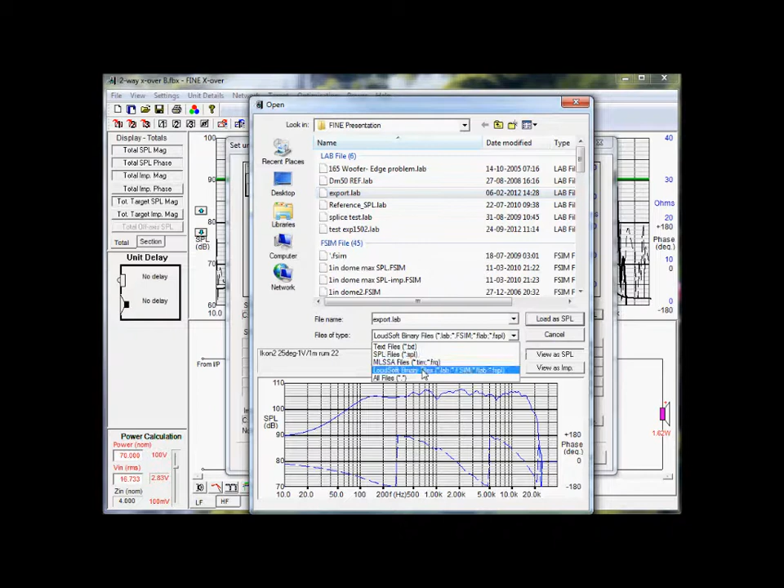So now I will show how to do a two-way crossover design. We import measurements. Here's an example. We can just take any responses we can think of. That includes MLSSA responses, text files from nearly every system. Once we've done that, we need to set the target level and do the same thing for the tweeter, and now we're ready to begin.

Here we have the low pass filter. We can have from first order up to fourth order, and every time you can see that this is actually what's happening. I can move the crossover frequency and the components update at the same time, and you can see that the response is far from the target. So let's see what we can do about this.

Now let's just do a simple second order crossover, and I will take this as Linkwitz-Riley because that works quite well. So now I have chosen a crossover frequency maybe close to 1500, and you can see it's still not very good, so let's do something about that. Now we can optimize these two components, and you can see now we came to a response which is actually quite close to the target.

So let's move on to the tweeter. With the tweeter we can do the same thing. We can change the crossover frequency, so we should try and arrive at the same as before. Let's go for Linkwitz-Riley this time and keep the target as the network.

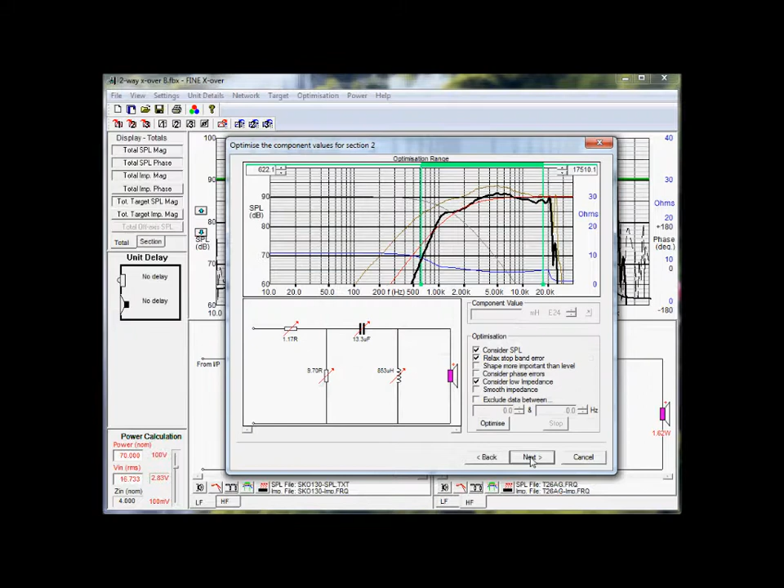This time we also need some attenuation, and I can just put in some attenuation and then let the system optimize. So here we will optimize this circuit now, including the resistors here for the attenuation, like that. And now we have optimized the two sections, and we are ready to move on to the final design.

Here we can see the resulting response, which is not that good. It did not add up really well. So we need to optimize this again, and let's just do that. And now I can see that this parallel resistor, maybe I don't really need it, but the system actually tells me, because it has optimized it nicely, and it says this is 1 megaohm. In other words, we can just leave it out, and then we have simplified it and we have a nice response.

Now let's move on to a more advanced three-way design. In this example I have already optimized the sections, and all we need is to optimize the final response, and we do it the same way as before. We simply set it to optimize, and we can see that it does it really well this time also. So let's move on and see how we actually made these sections.

So here is the woofer section, and we want a crossover frequency of 500 Hertz, and we can see the response of the woofer is actually this pink curve here, which has a very high peak here at 4K. So we really want to attenuate that. So we have chosen a third order crossover this time, and let's try and see if we can optimize this a little better.

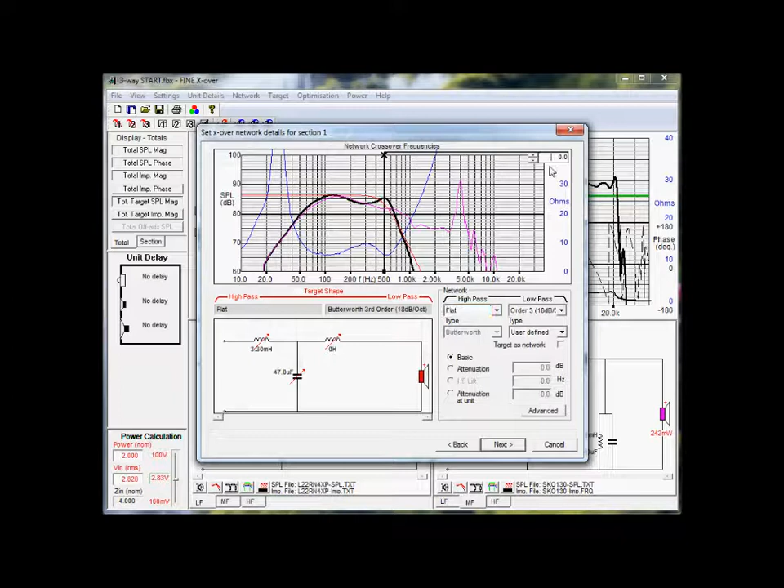Yes, but it's not really flat here, so we want to do that a little better if we can. So let's see if we can try and find a way to overcome this problem. And the problem comes from the rising impedance. It has a very long voice coil, and therefore the impedance is very high. We can do something about that.

We can insert a compensation circuit like this capacitor and resistor. So at high frequencies the capacitor will have a low impedance, so that the impedance here is very low, and therefore shorting the rising impedance. Okay, we will choose this, and this time we will try and optimize again. Aha, this way it worked a lot better.

We can see there's actually one component which is 0. We will leave it there because we may need it later, but it's interesting that it actually found a good curve without using the third order crossover.

Okay, let's move on and look at the mid-range. The mid-range should be ideally a band pass response, and you can see the target there. 500 Hertz there for the low end is good, but maybe we should do the high end a little better, so we could try and go for something like 4 kilohertz. Yeah, let's try that. Here we go.

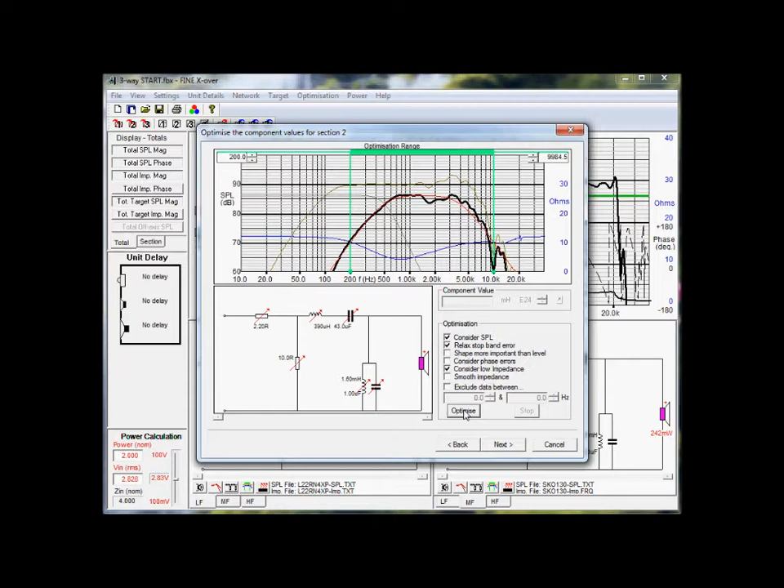And again, we need attenuation, which we have just set, and then we will try and see if we can get this done by the system. And certainly we could. So now we have optimized the mid-range, and we can move on to the tweeter. So this is the tweeter section, and we have 4 kilohertz crossover as before, and we can see we can just optimize this with attenuation.

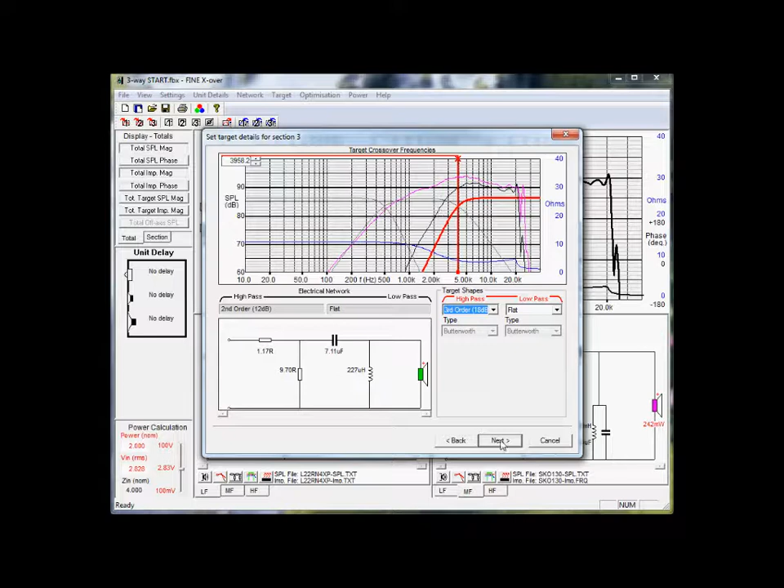But we notice that the slope here is different to the target. So let's try something special. If we uncheck this one and go on, now we can have a different choice of targets. So we can actually even have a fourth order target if we wanted to, but we can change it. So let's try this slope, which seems to match the real tweeter response. And now we'll just optimize with this one, and we got a very good response from the tweeter. So now we are done with all the sections.

So let's take a look at the final optimized three-way system. We can see that down here it's actually only second order, because the third order component was removed because we had the compensation circuit, and that was enough to build a very good response. So it actually saved a component by itself, and this we frequently find, that the program will tell us how many components we need.

We also see that this inductor here has now a series resistor, which real inductors do have, so we can just put it in there, and then when we do the system we can just optimize it again if we didn't have it in the first place.

We also notice that the mid-range is actually out of phase. It's inverted, and that's a very normal thing to do, and you can see that it works quite well because the phase response here is actually close to ideal. These lines should be ideally parallel. This is not bad. So this is considered a quite good design. However, there are other ways to do it, and I will show that just in a little while.

Now we had the mid-range out of phase, as you can see here. We can actually try to undo that. Let's put it in phase. Oh, we can see now the response has a big problem. But we have another way we can do this. We can place the drivers differently in time. So we can change the position and therefore the timing of the different drivers.